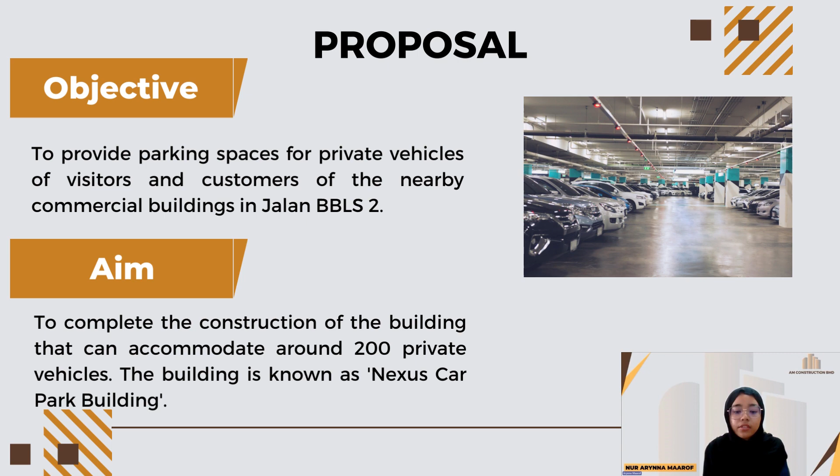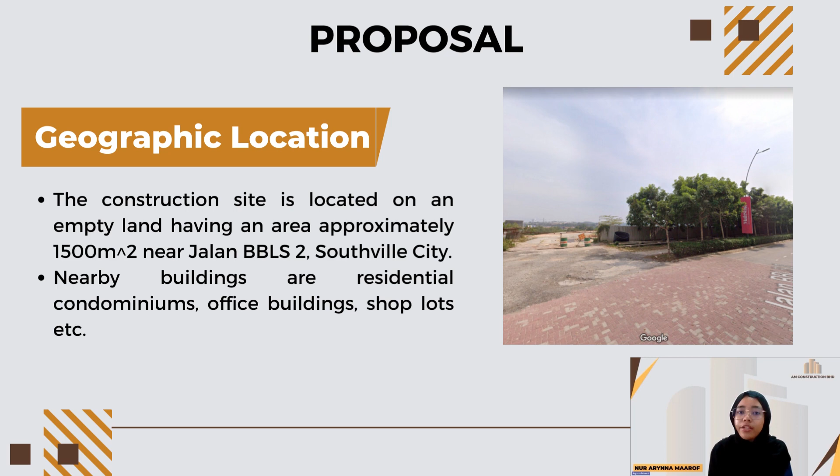Our objective for this project is to provide parking spaces for vehicles in Jalan BBLS2, Southville City. Our aim is to complete this project that can accommodate around 200 vehicles. This building is known as Nexus Car Park Building. For geographic location, this project is located at an area in Jalan BBLS2, and the nearby buildings are office buildings and shop lots.

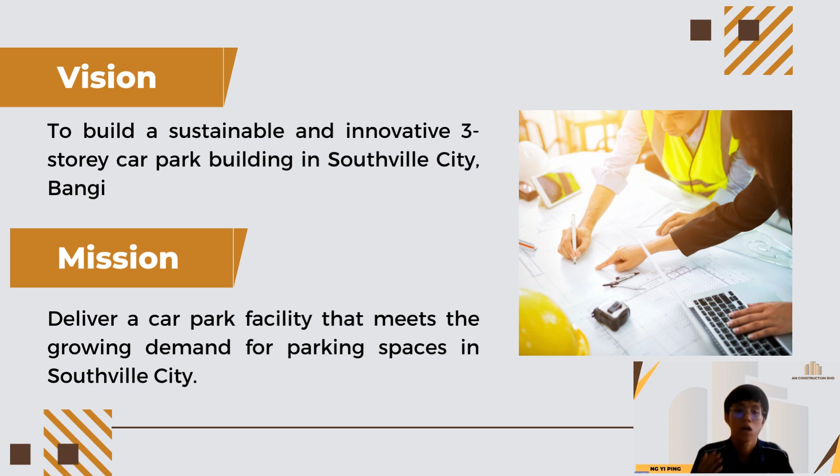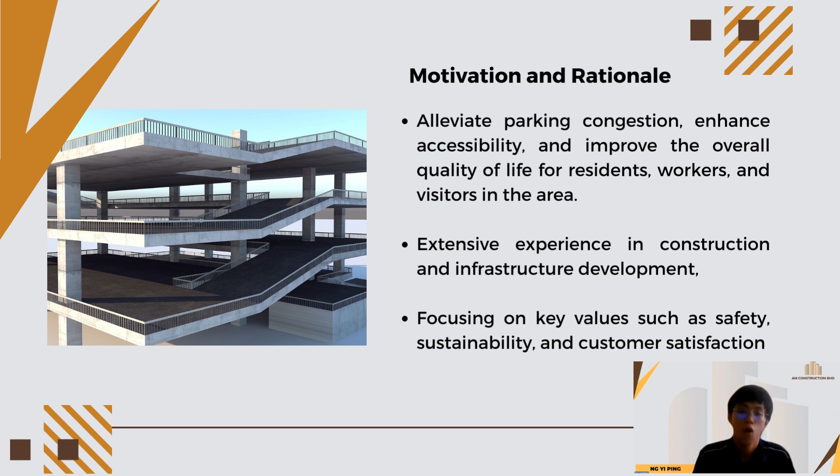The vision of this project is to build a sustainable and innovative three-story car park building in Southville City. The mission of this project is to deliver car park facilities that meet the growing demand of parking spaces in this city. The motivation behind our mission and vision is to address the increasing parking challenges. By focusing on key values such as safety, sustainability, and customer satisfaction, we believe that our organization is well suited to undertake this project.

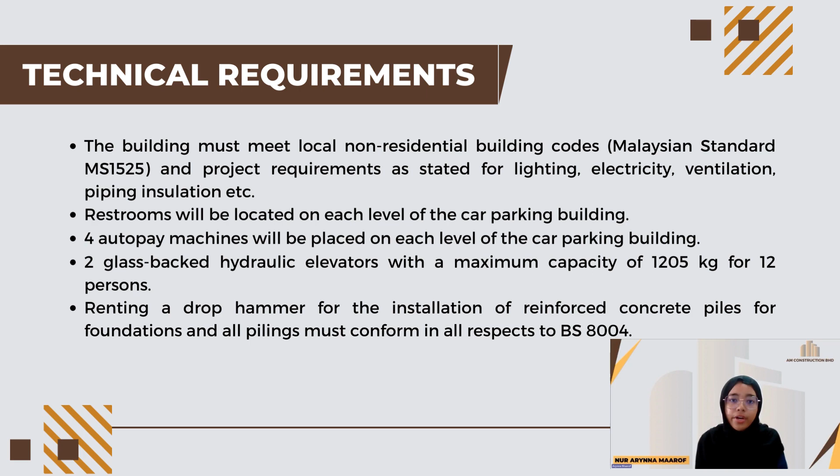As for the project relevance and need, Southville City is a township by Mah Sing Group with an area of about 428 acres, which includes commercial, recreational, and residential buildings. It is estimated that this township is serving around 69,000 residents. Because of that, traffic jams and a lack of parking are not an uncommon sight in Southville City.

By having enough parking spaces, businesses around the area would gain by having more customers able to park their vehicles at our parking lot. It would also be beneficial for the residents in the residential buildings as they do not provide enough parking for those that have more than one private vehicle.

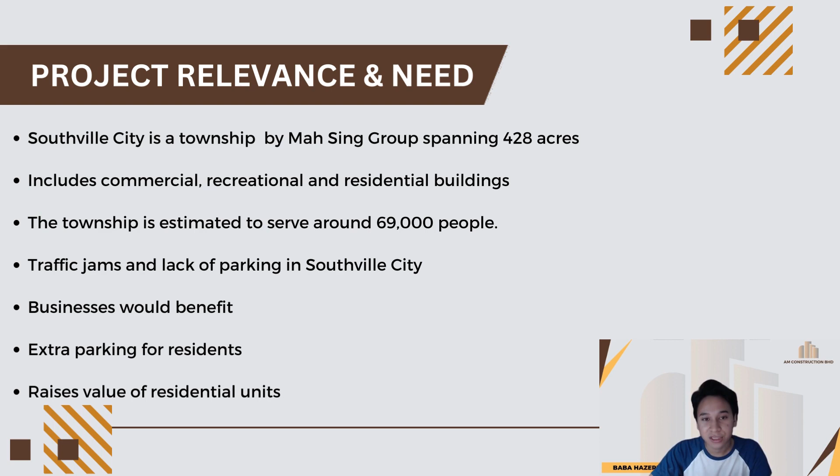This project would greatly benefit the township as the value of residential units would increase, which will drive more profits for each residential building. With an estimate of 69,000 residents in Southville City, it far exceeds the available parking spaces around the township, as high-rise residential buildings only provide an average of around one parking space per housing unit.

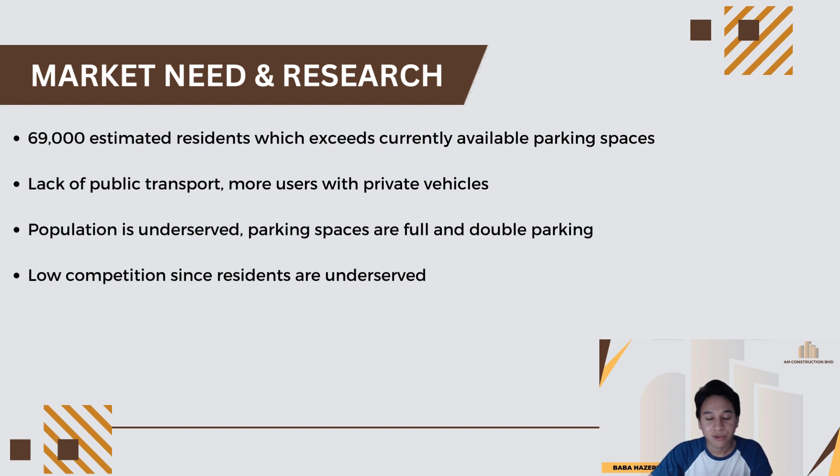Given that Bangi is lacking in public transportation, there would be more users with multiple private vehicles, which fills up the available parking spaces. Because of this, the population is underserved, where parking spaces are full almost all the time, and it may cause road users to double park and block the road, which may cause traffic jams and road congestion. Because of this, the project will not face much competition as the local residents are quite underserved.

In terms of resources, we have sufficient funding from our company and also by Southville City's developer. We are also partnered with a supplier for materials and equipment.

The project is estimated to be around 42 weeks long, starting from the 24th of March 2023 to the 8th of January 2024. It is expected that the land acquisition and construction works will be the most expensive, in which both combined is estimated to be more than 5 million ringgit in cost.

The source of revenue for this project would be from parking fees from customers and also billboard advertising rent.

The work breakdown structure is separated into 5 stages: design, site preparation, interior exterior construction, electrical and mechanical services, and finishes.

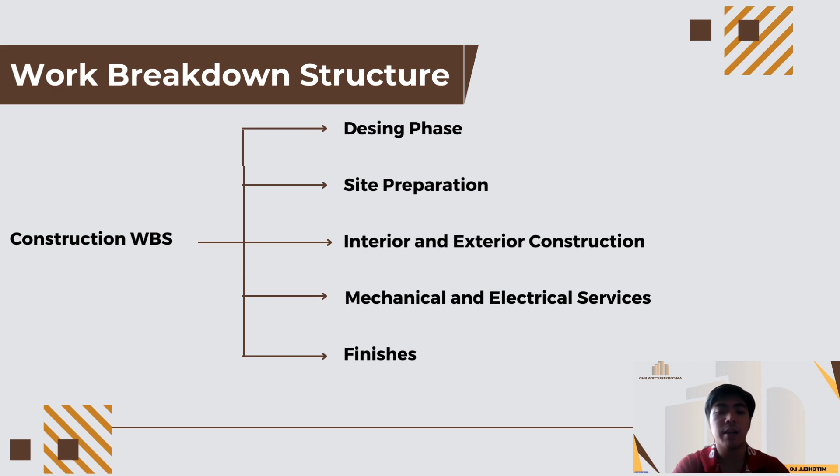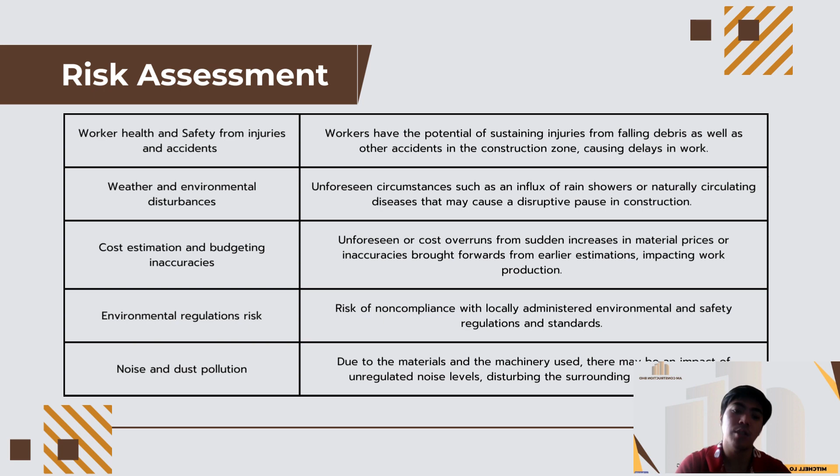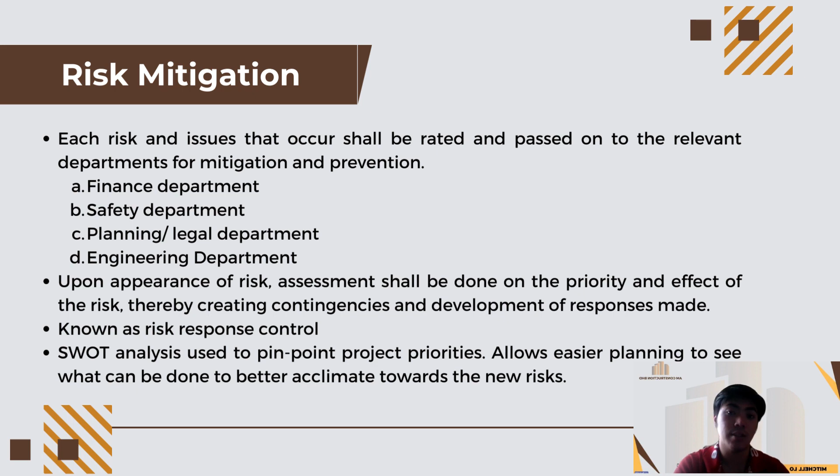SWOT analysis is used to pinpoint project priorities and allows easier planning with what can be done to better acclimate towards these new risks. The next part is the expected impacts and benefits, which have 3 types of impacts.

For the first one, we have expected results or impacts, which is a change in parking convenience. The second one is direct and indirect impacts, which is given to the natural environment. And the third one gives the national implications and benefits, which is community awareness.

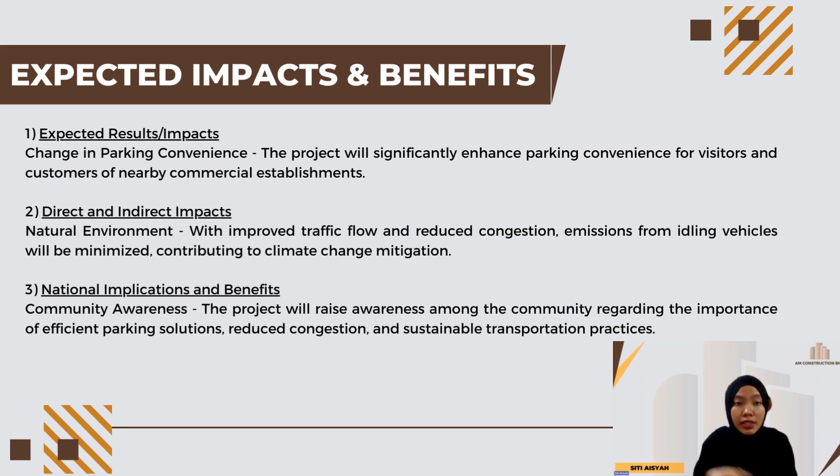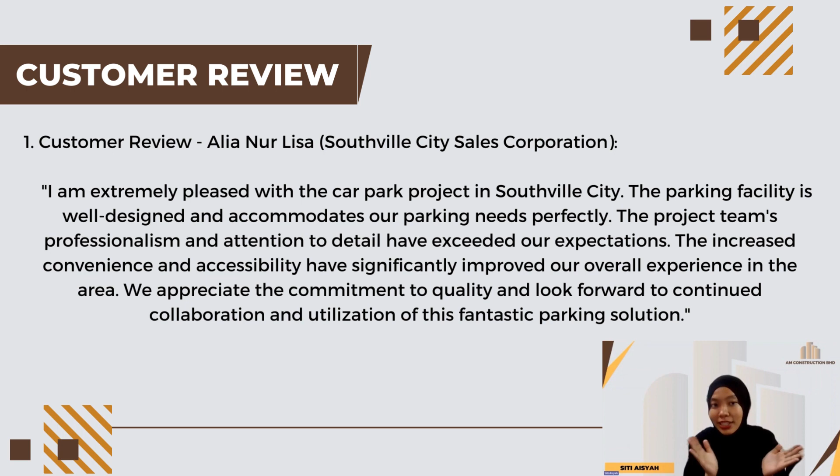And lastly, here is one of the customer reviews, which is from Alia Nur Lisa. She's from Southville City Sales Corporation, and she gave a good review for this project.